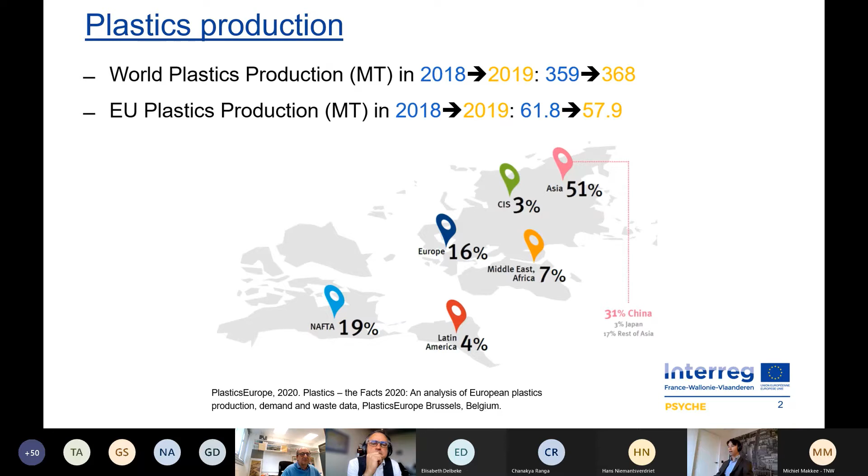As you can see, the world's plastics production is still increasing. In Europe, there's a small decline, but still it's very high. And recycling is high on the EU agenda. Next to plastic production, of course, you have product manufacturing, you have use, and then you have different options of recycling. It can be under the form of energy recovery, it can be mechanical recycling, it can be chemical recycling. And if we do that, then we can try to reduce our CO2 footprint of the whole value chain.

The central piece of all these elements is also the energy aspect, and that's also partly discussed in this workshop series with what can we do, for example, with renewable electricity.

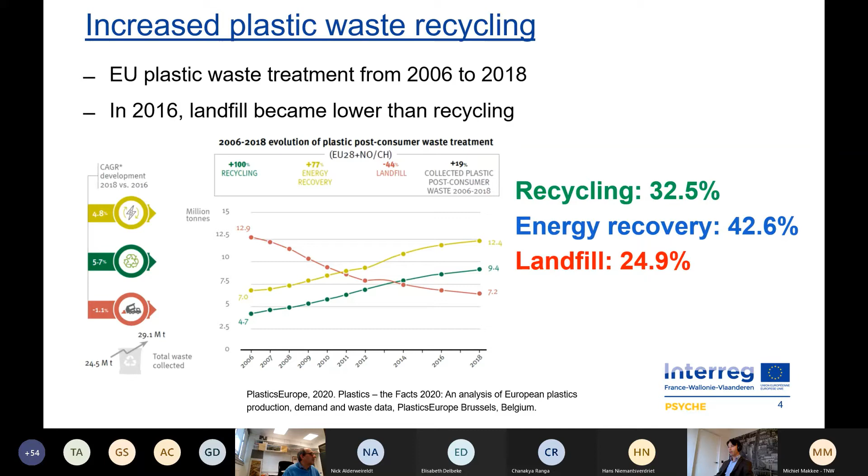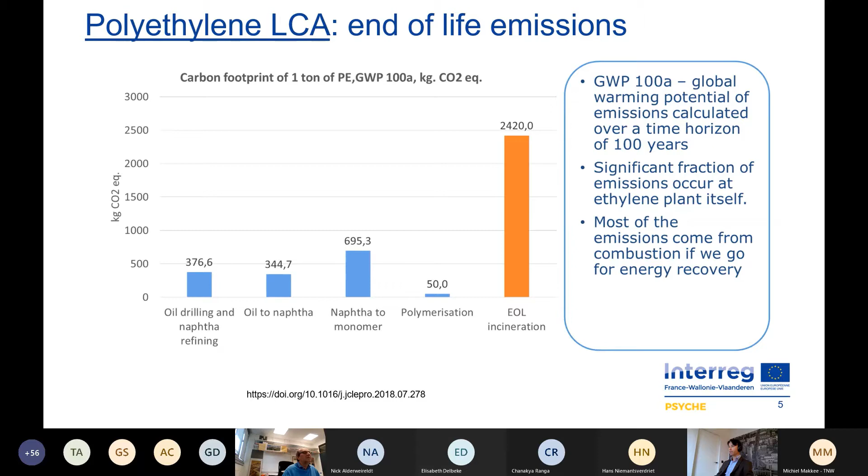So if you can avoid combustion, then we can make a step forward and drastically reduce emissions related to plastics production. Who are the partners?

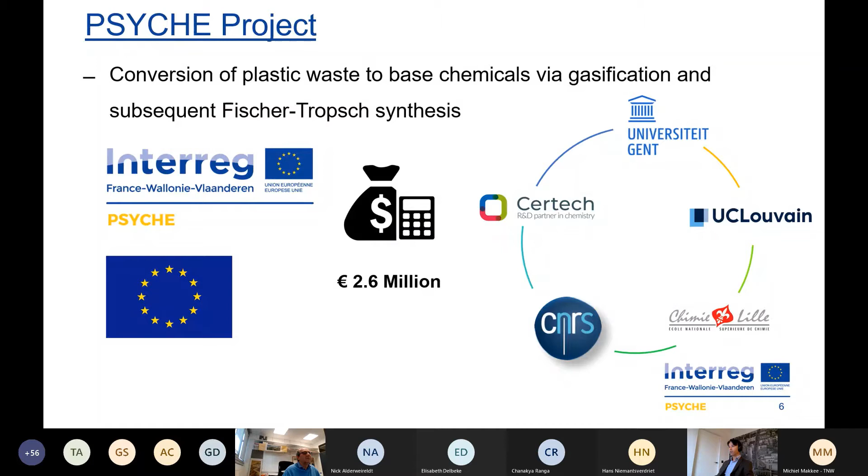So we have University of Ghent, which is my home institution. Then we have UC Louvain with Juray de Wilde. We have the University in Lille. We have CNRS and CERTECH. All these partners work together on this PSYCHE project, which got funding from Interreg, the France-Wallonie-Vlaanderen Interreg program.

The funding is 2.6 million euro. The central piece of this project has 2 parts: the pre-treatment and gasification of plastic waste, and then the syngas purification and the Fischer-Tropsch production of olefins. So the focus as an end product is really here on olefins. Next to that, of course, we have communication and education being part of the project.

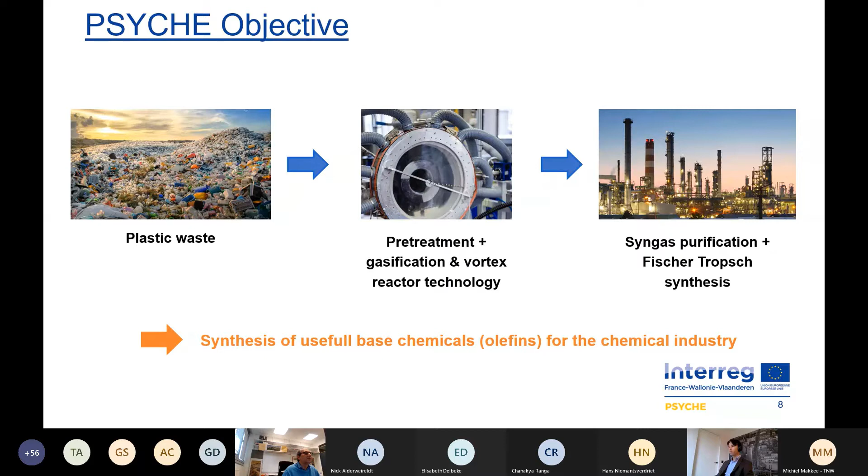The value chain in a nutshell, or a short overview, can be seen in this slide. So we start from unsorted plastic waste. We look at different pre-treatment methods. After pre-treatment, we can do gasification, and we do this in a vortex reactor technology that I will discuss later on. We go then to syngas purification and Fischer-Tropsch production, really wanting to produce useful base chemicals, olefins, for the chemical industry.

If you look at the slide from left to right, we have plastic waste, then the pre-treatment, then gasification going to syngas, which is a mixture of hydrogen and CO. Because there are also impurities in plastic waste streams like chlorine or other components, there needs to be purification of that syngas before it enters a Fischer-Tropsch plant, where the syngas is converted to, for example, 1-hexene or lower olefins.

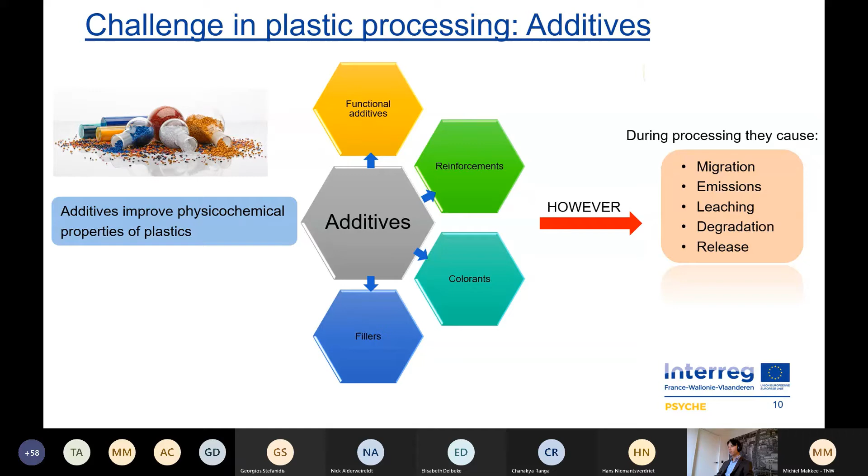Let's look a bit deeper at the pre-treatment step. We know that additives improve the physical chemical properties of plastics, and there is a whole range of different additives used: functional, reinforcements, colorants, fillers, and so on. However, for recycling, they do not make it easier, and removing them is not that obvious.

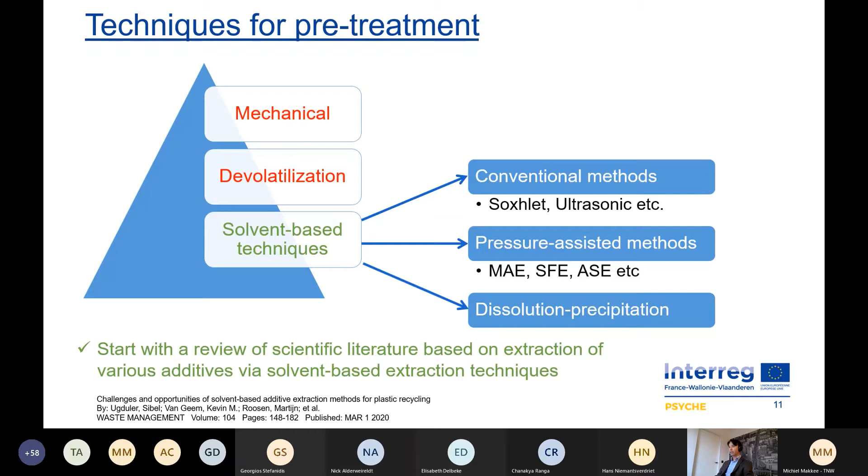The objective of that part is physical-chemical treatment of plastic waste via various extraction methods. We also look at different types of additives that we would like to remove, and in the end, we are optimizing that pre-treatment. I can say that Steven has made very nice progress in that part.

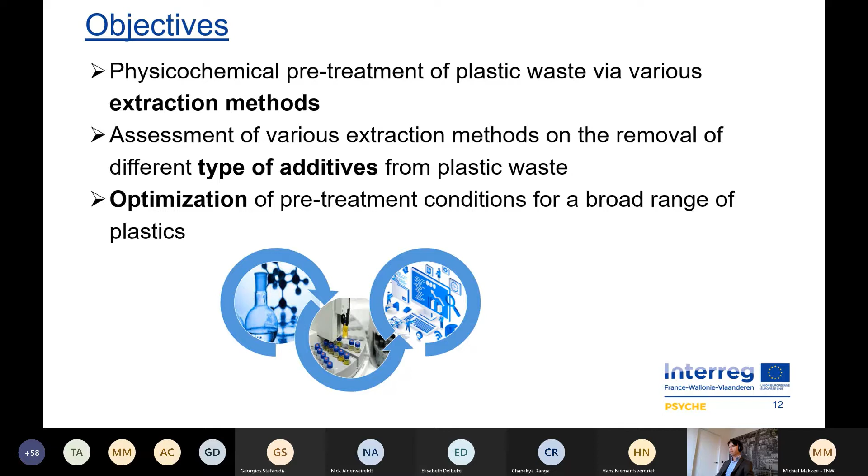Then we go to the gasification part, which is done in the vortex reactor. A vortex reactor is a bit of a special reactor, a sort of fluidized bed reactor, but not like a classical one. In a classical fluidized bed reactor, you have relatively low gas velocities because you have to work against gravity, meaning the gas velocity at the bottom is rather small, otherwise you have particle entrainment. You have a dilute bed in these technologies.

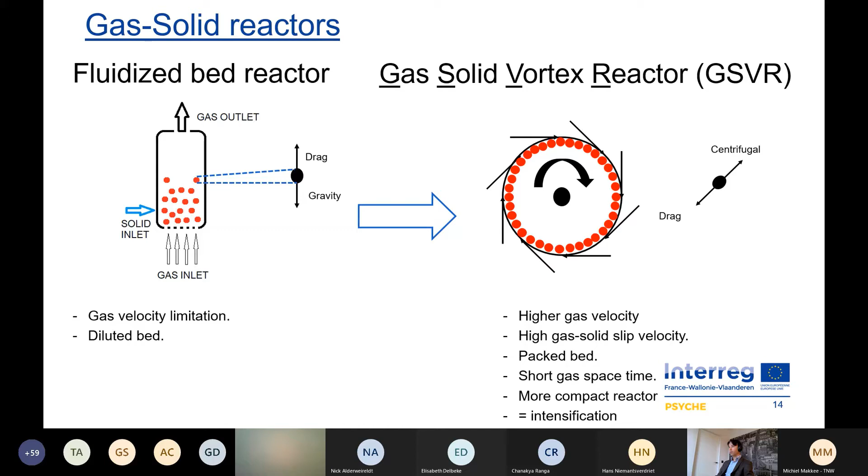If you look at our gas solid vortex reactor, it works a bit like your washing machine or dryer, where the particles are driven by the black arrows, which come in from the side and make the particles rotate at very high velocity. You can have very high gas inlet velocities, resulting in sometimes even a packed bed. The advantage is also very short gas space times, meaning you can avoid secondary reactions substantially. Overall, you end up with an intensified process, also with a smaller reactor.

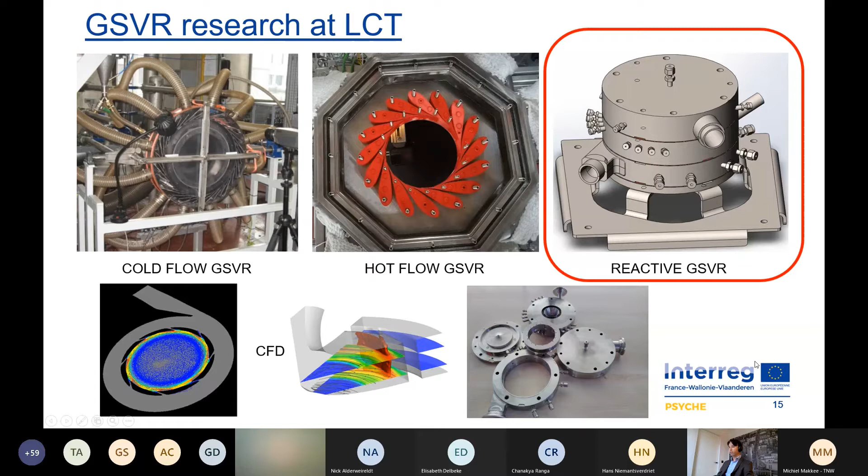You see here different reactor technologies that we currently have available in our group. The one on the right, you also see different parts here in the bottom. It's not only a nice drawing, but you see here the different parts of that vortex reactor technology.

So what happens is we have solid plastics. We go to the reactor environment via an extruder, so that's the plastic melting. That liquid is fed to this vortex reactor where you have pyrolysis and gasification going on. Then you end up with char and some remaining tar, but mainly vaporized and cracked gaseous products that in the end are mostly CO and hydrogen.

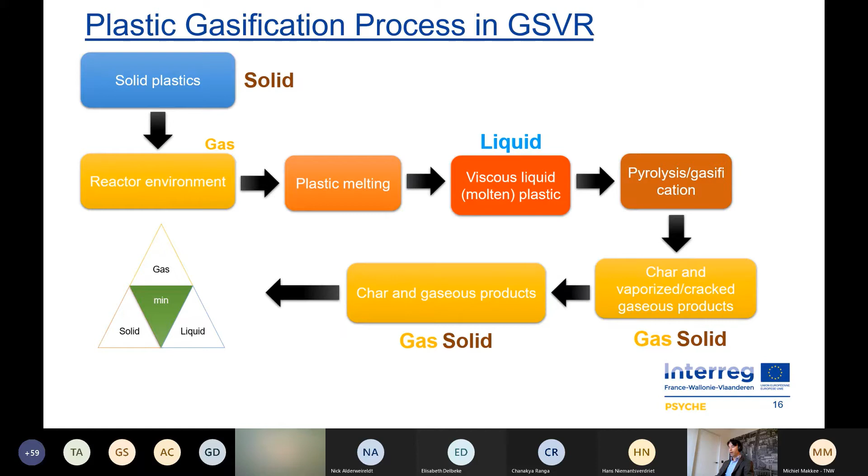By simple separation, we are able to remove the char in a cyclone, and in this way we end up with the syngas that can then be fed to the Fischer-Tropsch unit. What do we try to do in this project?

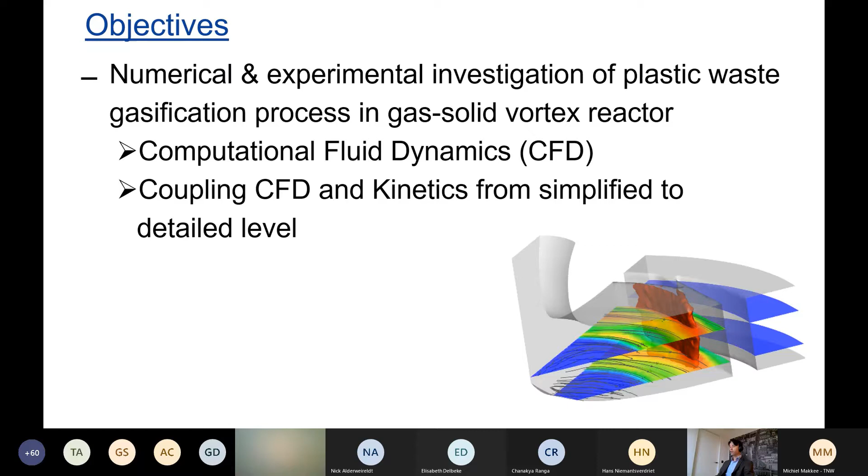Finally, we end up with the olefin production step. Of course, you can do this step sort of randomly - you can test a huge number of catalysts, screen them, and come up with the best design. In the PSYCHE project, we try to use model-guided catalyst design. This means we try to gain insight into the chemistry of the Fischer-Tropsch step.

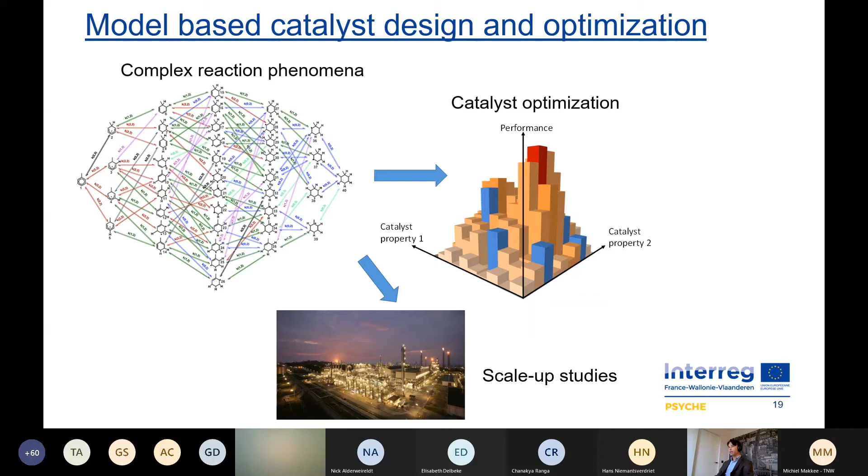We try to relate that back to catalyst properties, and when we understand how those catalyst properties affect the final selectivities, we can use that in our models and perform scale-up. If you look closer, in the end what we do is we have the reactor model equations. In those reactor models, you have the detailed chemistry, shown here as the microkinetics, which accounts even for things happening on the pellet scale. By integrating all these phenomena on the full reactor scale, we can predict in advance what will come out of this Fischer-Tropsch reactor.

Because we have some variables in this kinetics which account for the catalyst, you can basically optimize the whole system and come up with optimal catalysts.

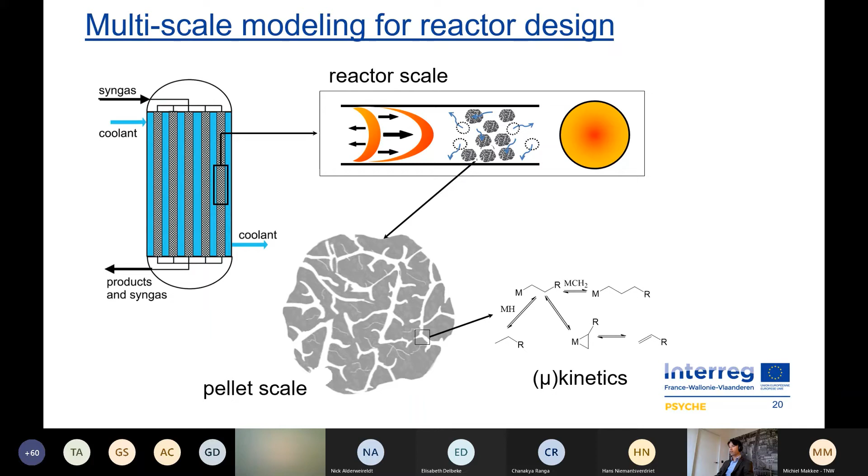Obviously, it's a challenge to account for all these catalyst descriptors in the model. But thanks to the group in Lille and CNRS, we have very unique data that we can use to validate this whole system, and that's what you need in the end to become predictive.

So now we have models that are able to describe the experimental data, but we also need to be predictive. This means we have to be able to account for changes to the catalyst, and this is still a step we have to take.

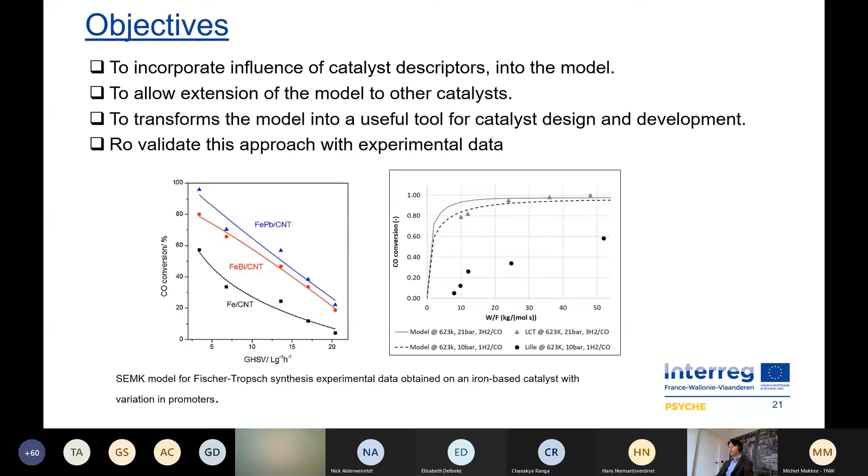Taking us back to today, if you do all these conversion steps, typically we use combustion to provide the energy for all these processes. If it's an exothermic process, you don't need a lot of energy, but if you have endothermic processes, then you actually need energy.

What we really try to do now is take this one step further: how can we further reduce CO2 emissions, or how can we even use CO2 in our processes. We hope that by electrification of this whole system we can further bring down emissions, but of course this only works when you use renewable electricity. If you use electricity from the current grid system, this is gray, and this results in additional emissions, sometimes ending up with worse situations than today.

We'll have some examples by Giorgio Stefanidis here today, where he will go into plasma technologies and see how we can use that to drive this chemical process.

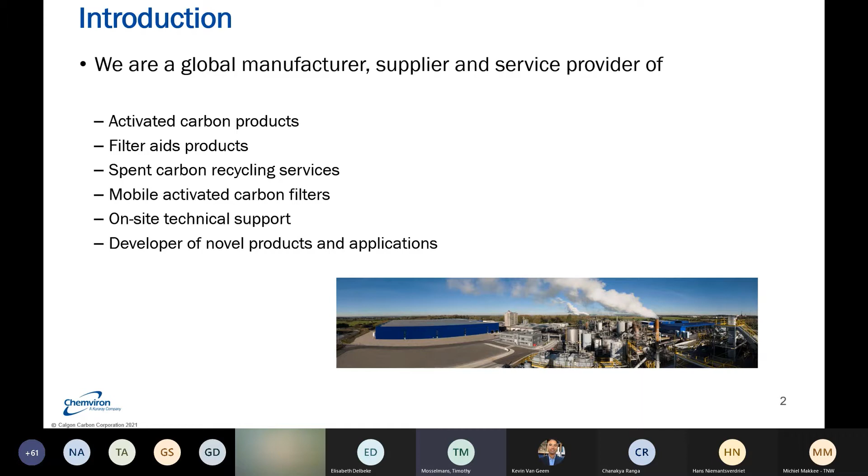So some quick numbers, maybe also noteworthy is that in 2018 we were acquired by Kuraray Chemical Group, and since then we are the environmental services division, although we do much more than just environmental solutions. We are also very active in purification of gaseous streams, liquid streams, and so forth, but more about that later on. So in Europe we're called Chemviron, but everywhere else in the world we are called Calgon Carbon.

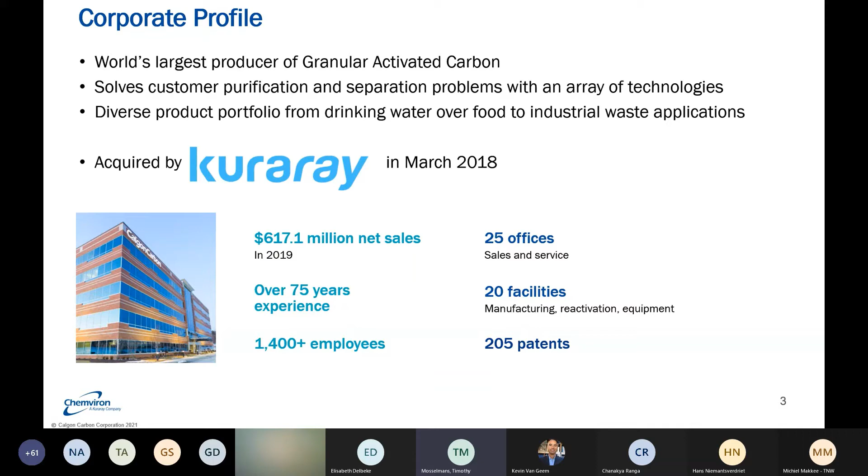As I already said, we are a global company, so that's quite interesting because some of our projects start off in one part of the world and then expand further and further through the whole globe. So we are in a position to basically follow the needs of our customers from one area to another. Maybe interesting to notice is that most of the activated carbon production is focused in the United States and in Asia. There's very limited production left in Europe, as in a lot of industries. But we provide our recycling services throughout the whole world, not only in the US, but very strongly as well in Europe. That's probably our main activity in Europe—recycling—and as well in Asia.

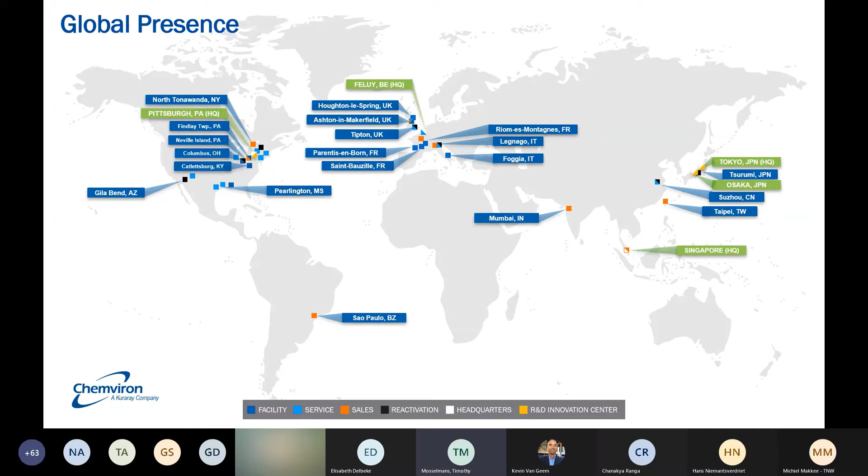Okay, so where can you use activated carbon for? When you look at industrial processes, we can do a lot of things with activated carbon. It can be purification of emissions to the air that are developed in a production process, or could be, for example, in refineries or similar, purification of liquid streams, of gaseous streams.

I'm thinking, for example, purification of natural gases, other pure gases in refineries that are done with activated carbon. Typically it's the removal of the final concentration of impurities, for large concentration ranges people tend to use things like scrubbers, but these scrubbers operate with liquids, and these liquids need to be regenerated. They can be fouled, and the fouling can again be removed with activated carbon. So we are present in quite a bit of different applications, just alone even in the refinery.

Next to the chemical industry, we are also present in drinking water, purification of wastewaters. A lot of food products are also purified with activated carbon to remove colors, to remove pesticides, other unwanted byproducts. Those are all things that can be done.

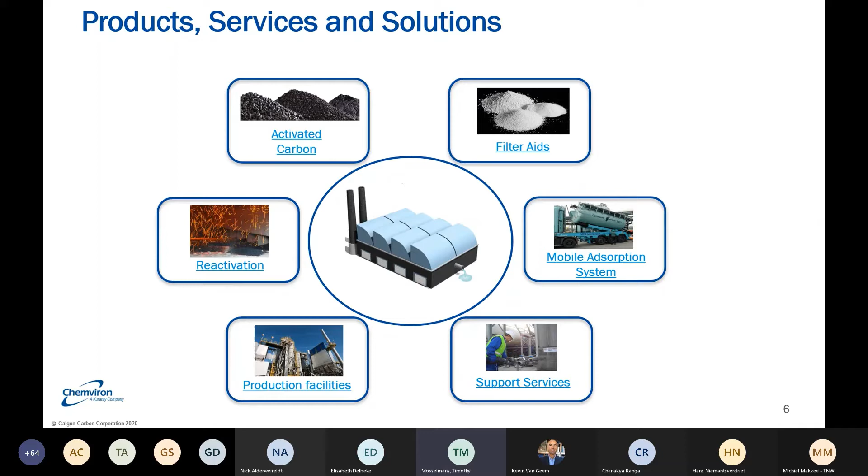We have seen in the previous presentations that incineration emits a lot of CO2, and that's something that came to our attention many years ago already. That's why we focus a lot on the reuse of activated carbon, because the material itself has a limited adsorption capacity. So it removes the contaminants and stores them inside its porosity.

So when that material has been exhausted, it has to be taken out, and in the past it was either landfilled or incinerated, but more and more we are recycling this material, and in Europe we've been doing that already since the end of the 1970s. We recycle the material thermally, where we destroy the impurities that have been adsorbed inside the pores of the activated carbon, and we reinstate the adsorption capacity of the material.

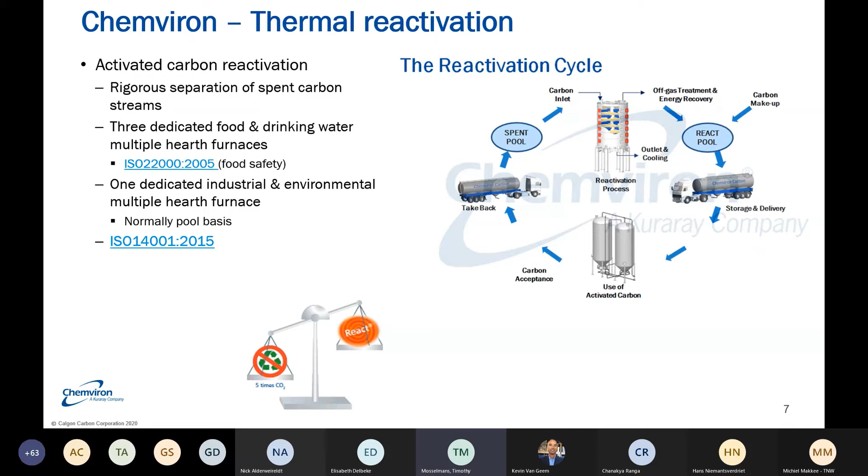So then I move to the next point. What is in fact activated carbon and what does it do? Well, activated carbon is basically a very crude form of graphite, which renders the material highly porous. And not only that, it also establishes a very wide range of pore sizes.

But it's really this random structure that gives the high porosity of activated carbon. So it's not really like a molecular sieve or a zeolite where you create a definite range of pore sizes that molecules have to migrate through. This is a very random structure where molecules diffuse in and are retained through van der Waals forces.

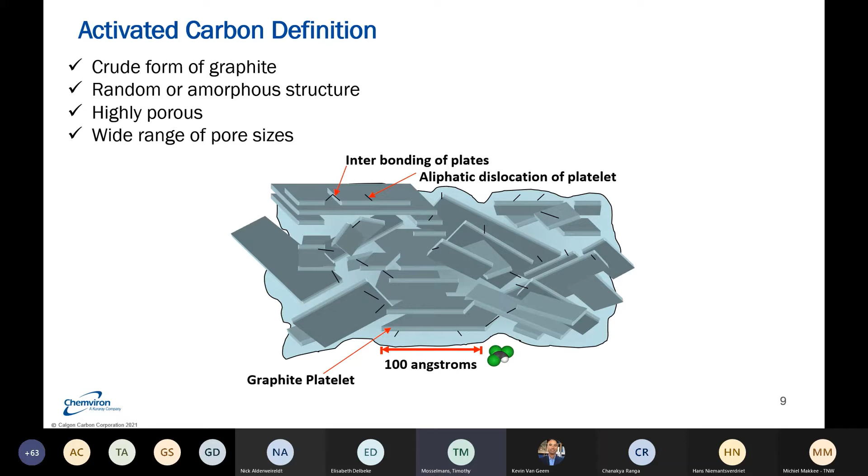Inside this structure, to give you an idea about the porosity or surface area internally inside activated carbon particles, if you would take 5 grams of activated carbon and cut it open and fold open all of its internal surface area, you would cover with 5 grams an entire football field. That's the amount of internal surface area available for purification, or in some cases for reactions to take place.

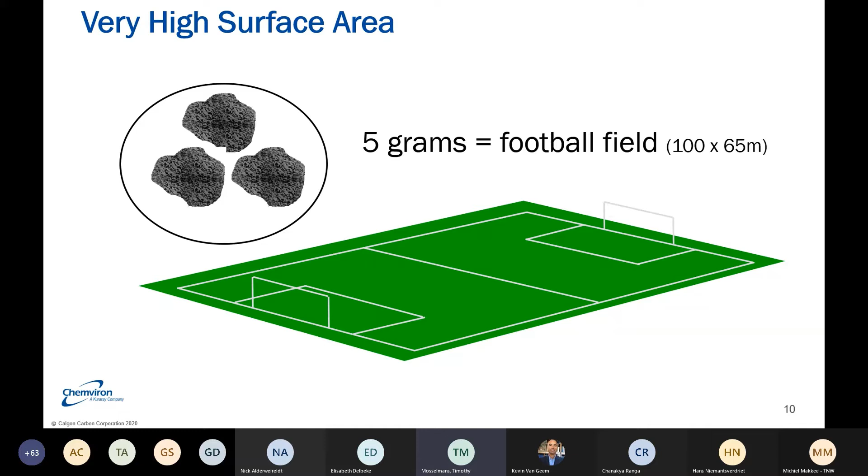Now, how are molecules retained inside activated carbon? Well, that's through adsorption, so the molecules do not change on itself. They are simply diffused inside the activated carbon, and then held in place through van der Waals forces, London dispersion forces to be even more precise.

It's thanks to the high internal surface area that a lot of interactions are developed with the molecules or impurities to be removed, and thus they are retained inside the porous structure of the activated carbon until they are either incinerated or until a reactivation is performed on that spent carbon.

Next up, this is a sort of cutaway view of how activated carbon would look on the inside and how adsorption takes place. To give you an idea, in a particle of activated carbon you would find about 35% carbon skeleton, 25% transport pores, and about 40% adsorption pores.

This is for activated carbon made out of coal. If you use another starting material, you get another ratio of skeleton, adsorption, and transport porosity. This ratio is quite important because on more viscous streams you need more transport porosity, whereas on gaseous streams, where diffusion is quite rapid, you don't need a lot of transport porosity, and thus you can aim for more adsorption porosity.

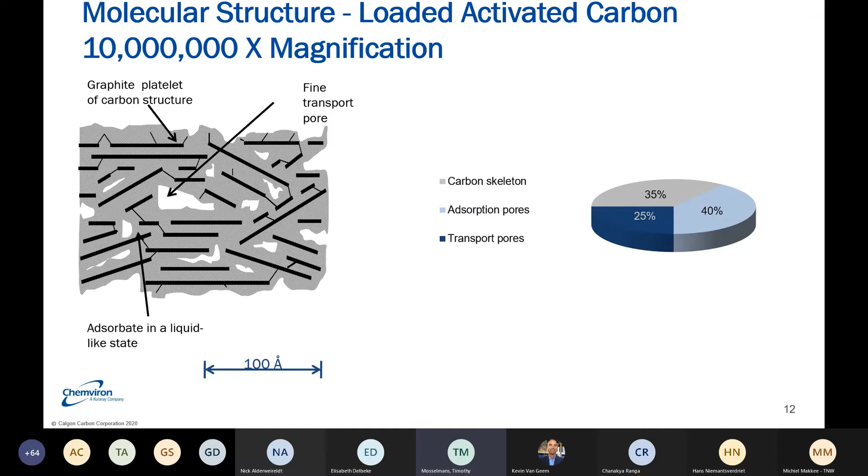So this is a little bit quickly explained how activated carbon can retain molecules inside its structure. Now, if we look at the different forms of activated carbon, as I said already, different raw materials can be used to produce it. They will also generate a different porosity structure, but we can also develop different ways of how the carbon would look like.

For example, we have carbon cloth, which is more for wounds, medicinal applications, and also some military applications. But you can also make activated carbon in a powdered form, a granular form, or an extruded form. Powdered activated carbon is typically used in labs or in batch-wise liquid applications, whereas granular activated carbon is used in liquid applications as well as gaseous applications.

Obviously because of pressure drop reasons. And also for these pressure drop reasons, in gaseous applications, we use extruded, pelletized, or cylindrically shaped activated carbon. That's really where pressure drop is the most limiting factor for the overall treatment. So different forms exist, different raw materials exist, and thus the choice becomes based on what we need to remove, what are the conditions, what are the constraints for the end user, pressure drop or certain performance. We will make a choice on what can be the best solution in that case.

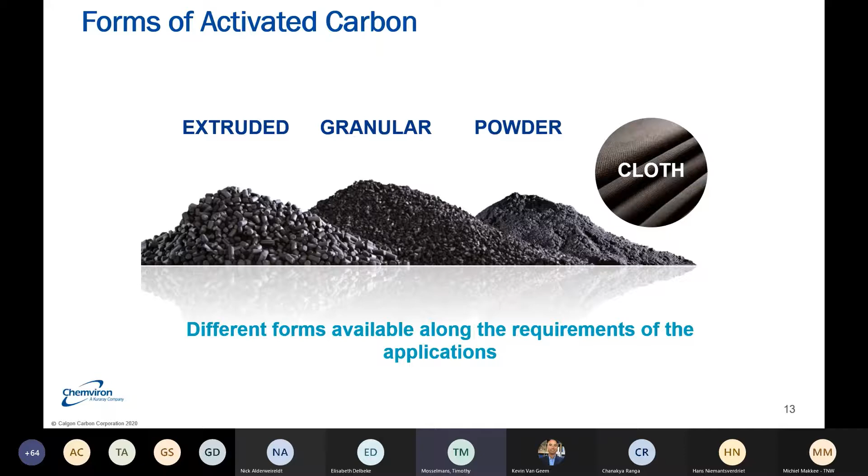A little bit more about what activated carbon can remove now. Activated carbon itself, as I mentioned, is made out of graphite platelets that are randomly organized. Now, graphite is a very apolar, hydrophobic molecule, so it's quite logical that the molecules that are preferably removed with activated carbon are also hydrophobic in nature. And basically, the flatter their 3D structure is, the better they are retained. So molecules with multiple aromatic rings are typically very effectively removed, as well as larger molecules. The bigger a molecule becomes, the more interactions it can make with the surface of the activated carbon, and thus, as a consequence, the stronger it can be retained inside the pore structure.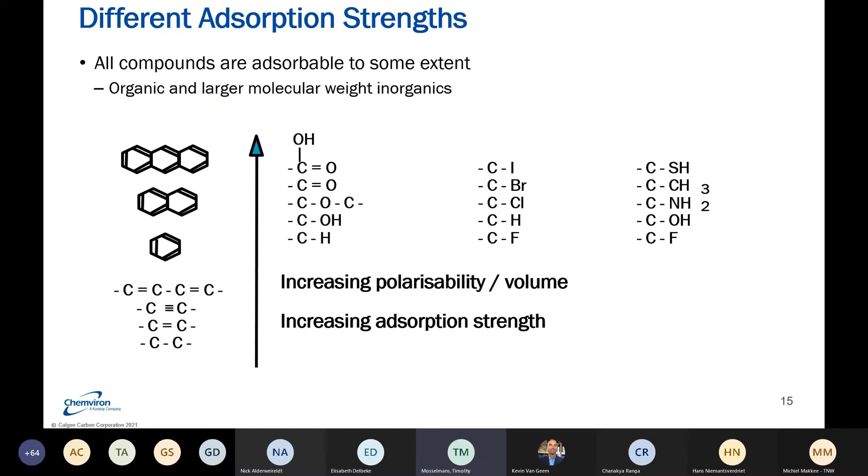Now, there are several compounds which don't fall into these categories, like, for example, smaller molecules such as formaldehyde or hydrogen sulfide. But for those, there are also solutions available. This is then more when it's a little bit of trace contamination removal, a few hundred ppmv, for example. At very high concentrations, people would maybe look at scrubbers, but at a few hundred ppmv down to a few ppmv, impregnated carbon can be a solution for removal of these compounds.

Impregnated carbon is basically the activated carbon, so the porous structure of the activated carbon, which gets impregnated or filled with an active agent. Typically, it's a salt that engages into a chemical reaction with the impurity which we would like to remove. And the reaction product is thus retained, either because the molecule has become bigger through an oxidation, or the molecule simply is associated with this chemical salt and thus is retained.

Molecules that are very effectively removed as such, for example, hydrogen sulfide, ammonia, carbonyl sulfide, mercury as well, phosphine, arsine, and the list would go on a little bit further. In these kinds of processes, temperature, humidity, pressure, and concentration as well of other compounds can be very important factors.

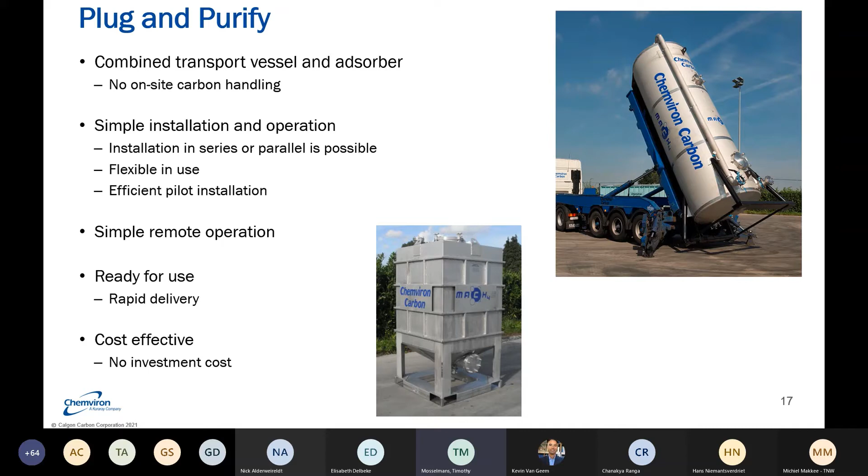Give you an idea about the size and what we're talking about. These type of adsorbers are capable of handling up to near half a bar gauge, with flow rates from 400 to 3000 actual cubic meters per hour. These adsorbers can accommodate the use of around 50 tons of activated carbon per year up to several hundred tons. The smaller one can hold 2 cubic meters of activated carbon, whereas the bigger one is typically filled with around 18 cubic meters.

And these are adsorbers that are approved for uses in, for example, biogas, biomethane, or biosyngas.

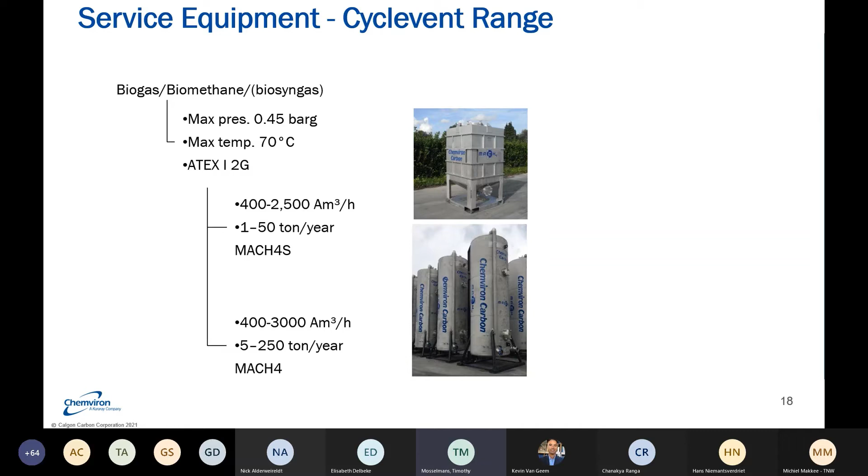Now I have something as well added on the purification of syngas. For example, what kind of contaminants do we see in different syngas applications, and what can be removed?

Well, if the syngas is produced out of biomass, we sometimes have requests for removal of hydrocarbons, for example terpenes, or hydrogen sulfide and carbonyl sulfide. For hydrocarbons, we'd use a simple non-impregnated activated carbon, the EnviroCarb range, that makes interactions with these hydrocarbons and retains them inside its porosity. For hydrogen sulfide and carbonyl sulfide, you'd need an impregnated carbon, as these molecules are too small to interact with the surface of the activated carbon. Important to note with these molecules is that humidity, oxygen concentrations, and concentration of other impurities can have a profound impact, and different solutions will exist depending on the situation.

Syngas in refineries, we can find hydrocarbon and H2S type contamination. We can also find mercury as a contaminant, for which we have an activated carbon that we've been using since the 1970s in refineries for removal of mercury down to nanogram levels. Next to that, there's also iron and nickel carbonyl that sometimes pops up in the pre-treatment of syngas. Those two molecules are in fact very effectively removed on activated carbon - they're sufficiently large, and thus very effectively removed on this non-impregnated BPL type activated carbon.

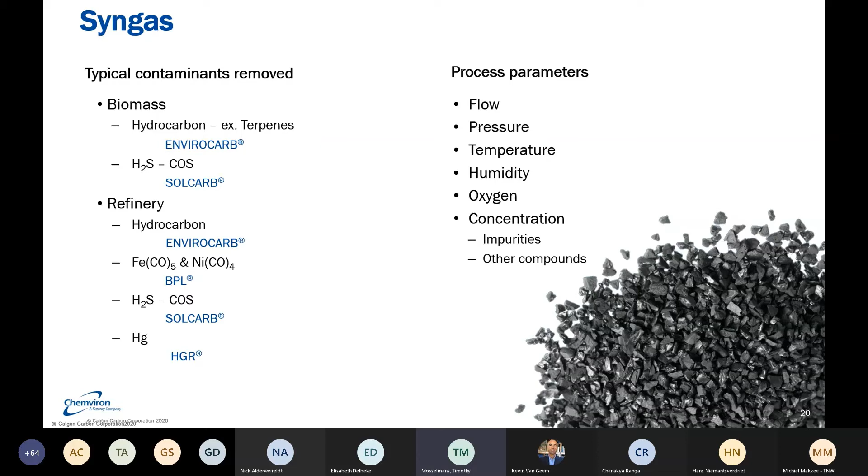Now, next to this, I have here with me a small example of removal of terpenes in a biosyngas application. So it's a system - you can see it's a little bit of a remote system. It was added onto a site where we have a flow rate of around 1,000 normal cubic meters per hour, a slight overpressure in the system, and ambient conditions, obviously, because everything is located outside in terms of temperature.

And because they started off as a new project, they were interested in using our plug and purify adsorbers at first. So we provided them with the larger one, the 18 cubic meter Mach 4 unit, for removal of mainly terpenes but also some other organics from this biosyngas. For that, we don't need any impregnated carbon, so we chose the EnviroCarb range activated carbon, a granular one, as it was compatible with the requested pressure drop and also provides for a better distribution of the flow.

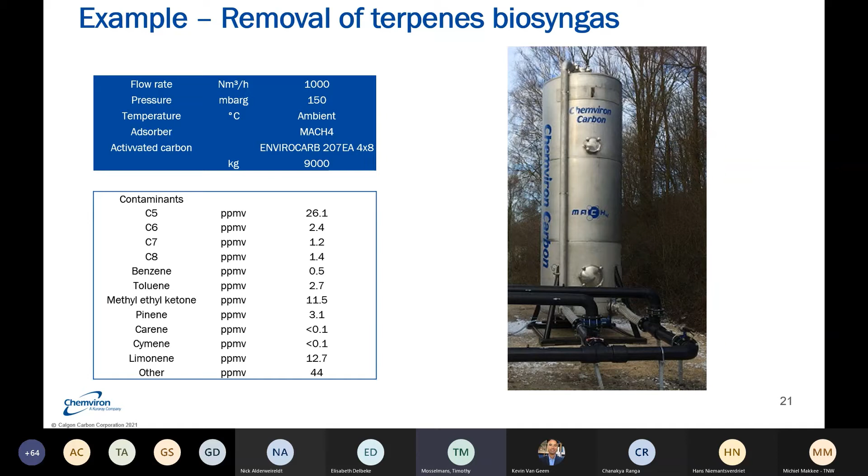So in terms of the contaminants that were requested to be removed, we see it's a very broad range going from C5 to C8 alkane type compounds, as well as some traces of benzene, toluene, and also the terpene molecules that were identified. Now, as I already mentioned, these molecules will diffuse into the pore structure of the activated carbon and be retained there.

But by doing so, they will need a certain length in time, path, or bed depth to be effectively removed, a little bit like in chromatography. Now each of these molecules would need to do that, so we get a complex pattern of different mass transfer zones that develop.

Internal competition will come into play. So what we do is first look at the conditions presented by a project or customer, then make an evaluation about the sizing. The sizing is not only based on adsorption capacity itself, because compounds like benzene and toluene are very effectively removed on activated carbon, with very high adsorption capacity.

But when we look deeper using our proprietary adsorption models, we see that some molecules that are very effectively removed would in fact be the limiting compound of the whole exercise. For example, pentane-type molecules are present at the highest concentration but only elute as the third compound out of our columns. Benzene, present at very minute concentrations, is actually the limiting compound of the whole column.

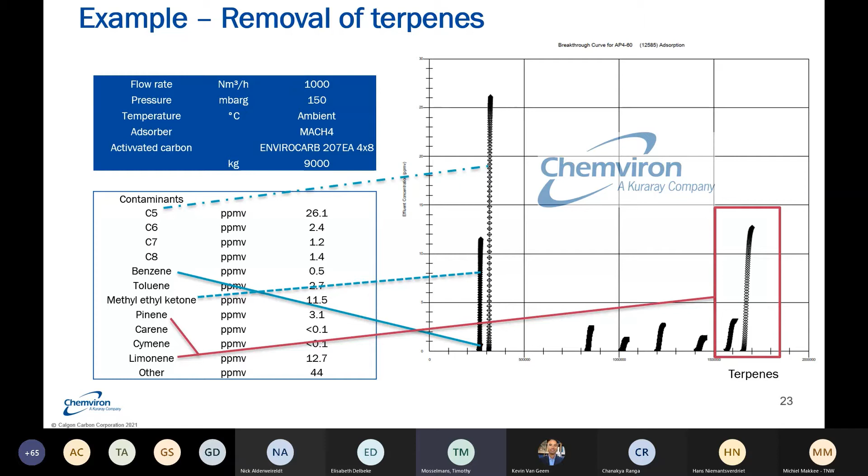In conclusion, activated carbon is a very versatile means for purification. A lot of different compounds can be removed. Either fixed adsorbers can be made, or people use plug and purify through mobile adsorbers. Quite importantly, we try to recycle as much as possible the used activated carbon to make a closed loop and limit our CO2 footprint of activated carbon solutions.

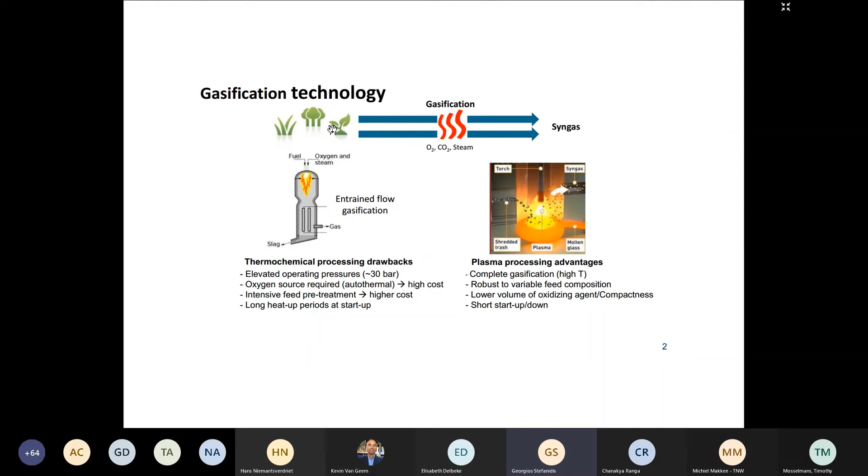And the fact that we can decouple the composition of the oxidizer from the energy fed into the system also gives some flexibility with respect to tuning the composition of the product. As you're going to see later, it's a very fast responding process, so the time to steady state is really fast.

Now, when it comes to plasma gasification in particular, there are different types of plasmas. The most mature one that has been applied for gasification is thermal plasma, which you should understand as plasma being in thermal equilibrium—meaning all the species inside plasma have approximately the same temperature. The system is in thermal equilibrium, so the degree of ionization is very high. The electrons generated get a lot of energy, which they transfer to ions and neutrals, and eventually the system comes to thermal equilibrium.

But that results in excessively high temperatures. In the core of the plasma flames, you may have temperatures that well exceed 10,000 degrees Kelvin. So the temperature is really way higher than what is needed for gasification, and that's not a good thing.

Also, it's a process that involves electrodes, which have a relatively limited lifespan. They need to be replaced frequently, which requires quite some maintenance. Also, the product is contaminated due to frequent electrode erosion. Also, quite some electric energy is dissipated into heat, not inside the reactor but inside the hardware itself, which limits the overall energy efficiency. Nonetheless, this is still today the most mature technology for this kind of process.

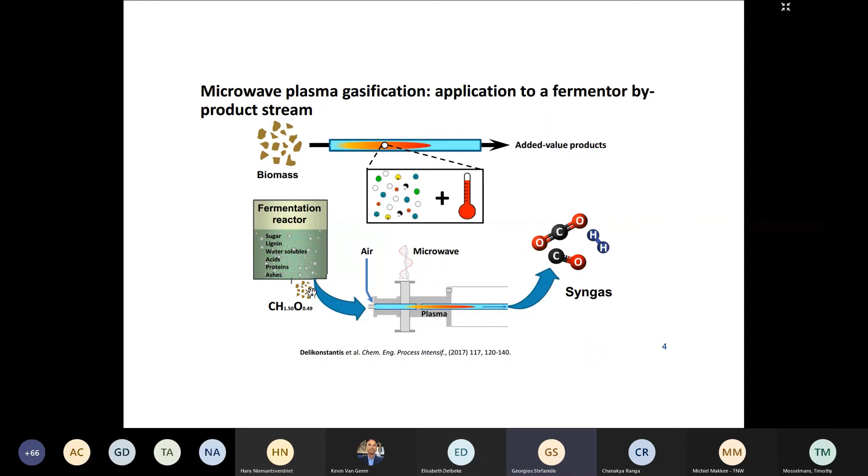The elemental composition is carbon, hydrogen 1.5, oxygen 0.49 for the results you're going to see. These samples were provided to us by Clariant, and the analysis was done by them too.

So this is the setup that we had developed at the University of Delft. The main part is this one, the microwave part of the equipment. On the right side you see the magnetron. It works up to 6 kilowatts. It delivers continuously microwaves through this waveguide into the reactor assembly that sits here.

On the other side, there is a movable reflector wall that tunes the field such that we create a resonant field with one field maximum inside the reactor where gasification takes place. There are some impedance tuners here in order to minimize the power that goes back to the magnetron. There is an isolator here in order to absorb whatever power cannot be contained inside the system between the reflector and the impedance tuners.

On the top you see our feeding vessel, and this is the reactor assembly. I'm going to discuss some components in more detail. Process-wise, the carrier gas together with the biomass particles are fed from the top inside the tubular reactor. The diameter is 3 centimeters, the length about half a meter. Ignition takes place here, and the plasma flame points downwards.

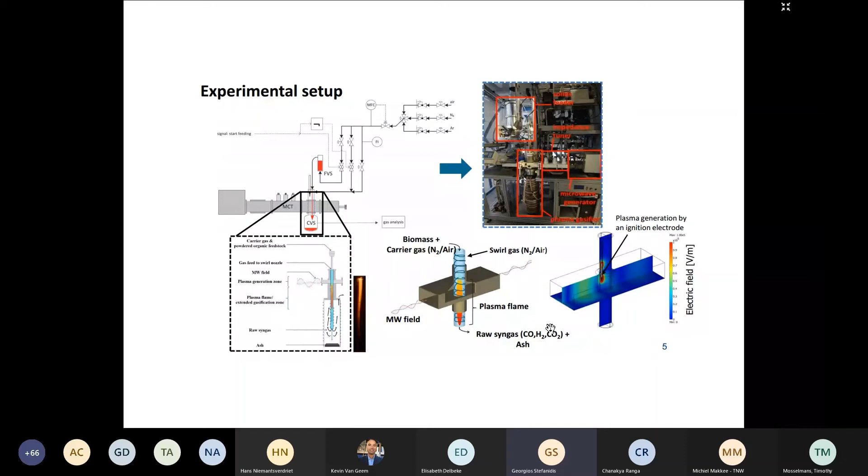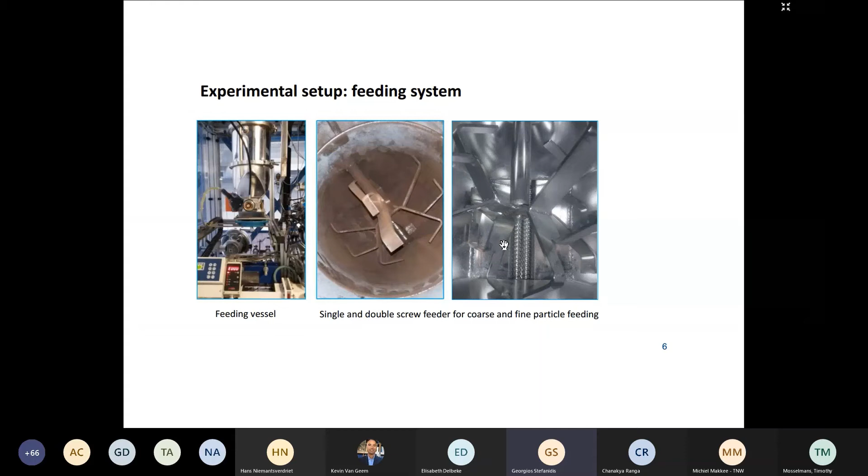This is the feeding vessel and the screw feeders that we were using. Single screw feeder and double screw feeder to be able to provide coarse and finer particles stably into the plasma flame.

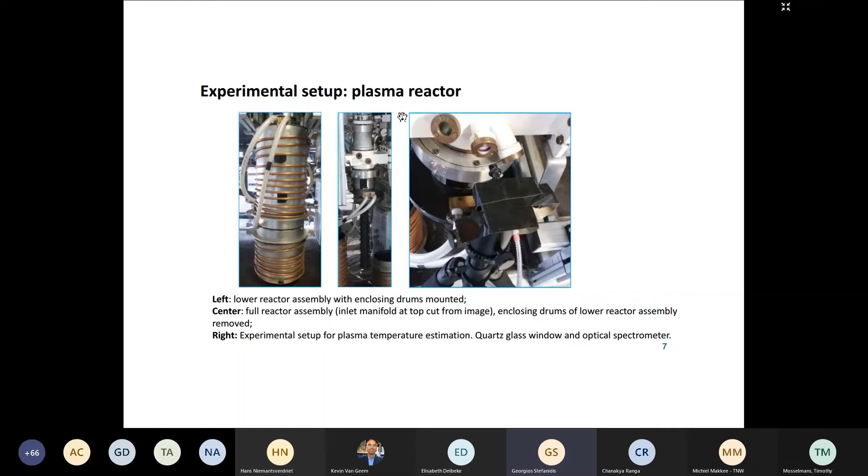When we do reactive experiments, the whole thing is placed in a drum, and at the bottom we collect the ash, and then the syngas product goes upwards and towards the backside of the reactor for further cleaning before we measure the composition of the syngas.

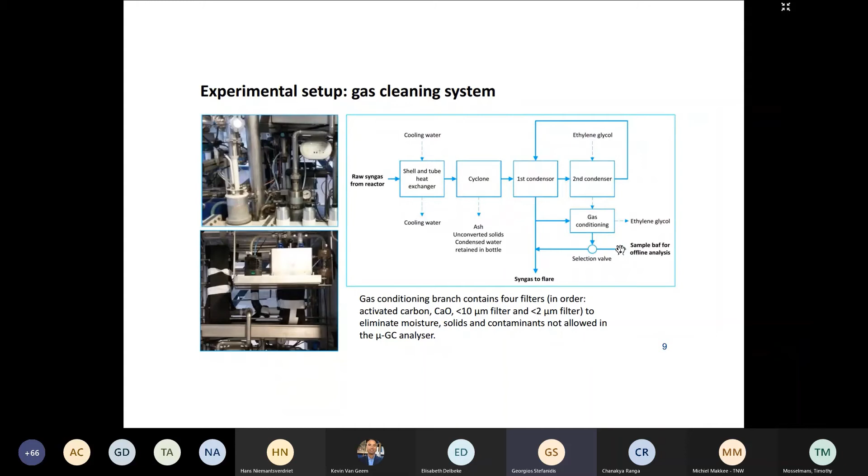And then we have, very briefly, the gas conditioning section that comprises four filters: activated carbon, a filter with calcium oxide, a 10 micron and a 2 micron filter, to eliminate all moisture, solids, and contaminants before the gas gets into the sampling section. So we sample part of the gas and the rest goes to flare. So this is briefly how the setup looks like.

Now a key issue in this process is the distribution of the heat fluxes and temperatures inside the system. That significantly affects not only performance but also the stability of the process, and it's a challenge to measure temperatures inside the system. We do the thermal analysis using non-reactive experiments, so we just feed air and nitrogen. We cannot do that while the gasification process itself is running, but that way we get a feeling of what temperature levels we have inside the reactor.

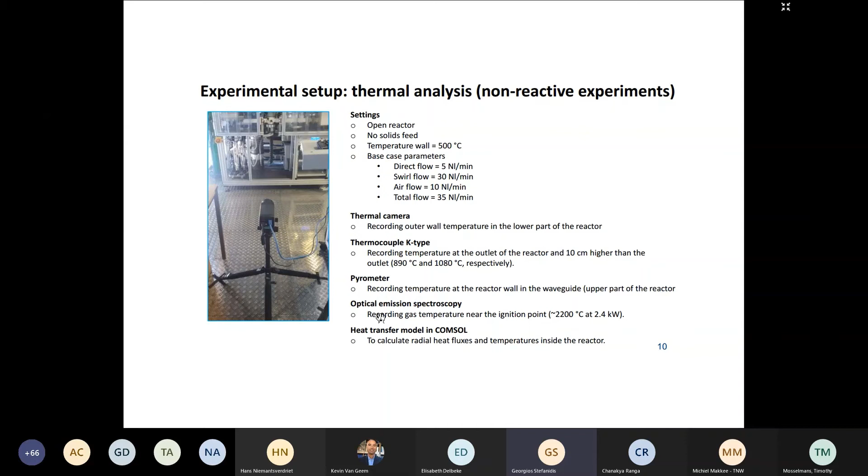So you see the temperature level at the representative power level at which we do the experiments, and you're going to see the results. And we also use a heat transfer model in COMSOL, without flow, to calculate heat fluxes such that they match these temperatures that we measure in the domain.

And the important thing from this analysis is shown here. No matter what material we use, we have to remove, only in the lower part of the reactor, some 40 to 45% of the total energy that we put into the system in order to be able to keep the wall temperature inside the waveguide limited.

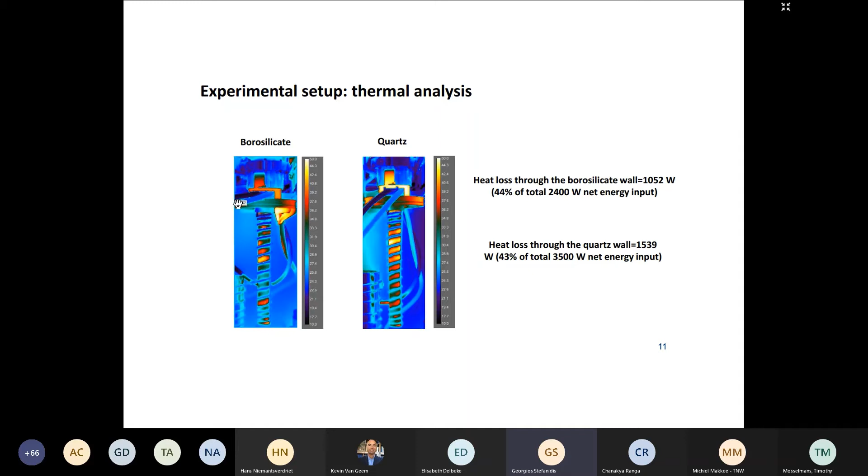What we observed is that when the temperature goes higher than this value, the temperature of the wall rapidly increases up to the melting point, which is 1700 Celsius. We would expect that quartz would be able to stand these temperatures, but...

What I think was happening is that the dielectric properties of quartz at these temperatures change, and then the wall itself, which is otherwise meant to be transparent, starts absorbing microwaves, and then we have a runaway phenomenon. The temperature goes to the melting point, and of course the process is shut down.

But even without this problem, we have also stability problems—material stability problems—downstream, even near the outlet of the reactor, when we heat and cool all the time due to thermal shocks, or when we don't tune the flows properly and we have the flame touching the wall, or when the temperature of the flame goes too high. Then we have initially swelling, and then eventually breakage, and we had to actually kill tens of reactors due to thermal failures. So thermal failure and significant heat losses—avoiding them is two important problems.

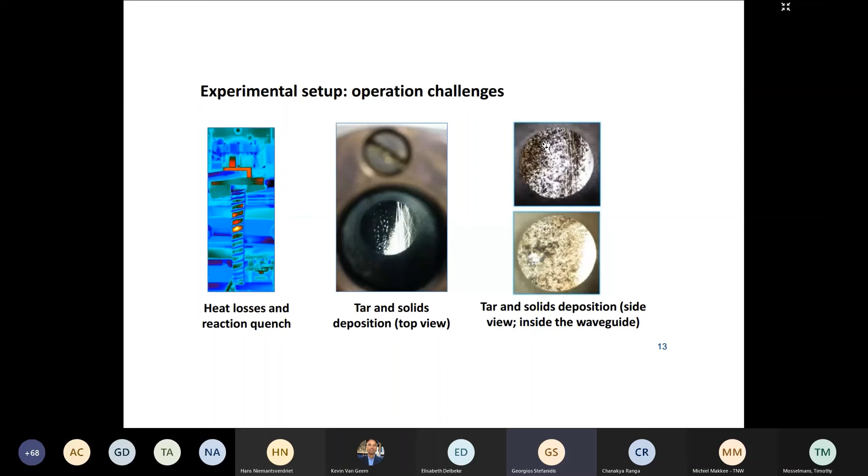The third main technical issue was the deposition of tars and solids on the walls. You don't want to have that. First, because part of the material is not converted, but other than that, when you have deposition of carbon on the walls, that prevents penetration of microwaves inside the flame. So microwaves are dissipated where you don't want them to be dissipated, that is on the reactor walls, and then you have the phenomenon that I described before.

So some results with that feedstock that I mentioned. This is the elemental composition of the feed, as received, on dry basis and dry ash-free basis.

Basically, what we wanted to do was identify an operating window for stable operation and for high performance. By high performance, we mean high carbon conversion efficiency and high cold gas efficiency, which in the case of plasma is defined by that ratio. In the numerator, you have the lower heating value of syngas, and the denominator is the lower heating value of biomass plus the power consumed by the magnetron.

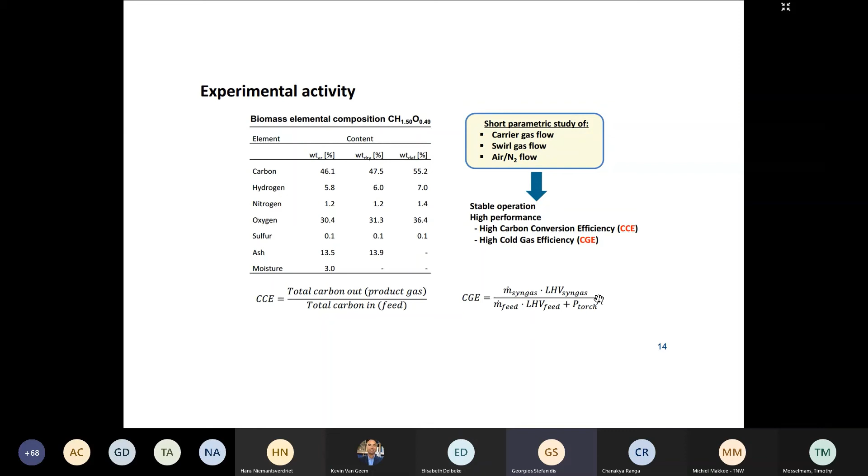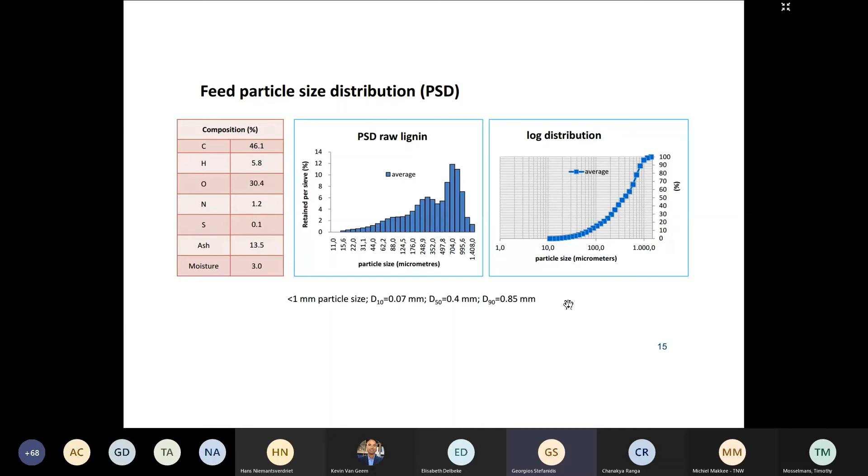This is the particle size distribution for the results I'm going to show. The particle diameter is up to 1 millimeter. You see the characteristic D10, D50, D90 values here. We also did experiments with finer particles, but I'm going to present the results for the coarser ones.

Very limited operating window. Stability of processing in this type of reactor is still a bottleneck. So this is the base case: the direct flow that carries the biomass down the reactor, the swirl flow, and the air to nitrogen ratio.

In experiments 2 and 3, we keep the direct flow constant and vary the swirl flow. In experiments 4 and 5, we vary the ratio of the direct and the swirl flow, keeping the total flow constant at 35 normal liters per minute.

The biomass feed rate was quite low, 0.1 gram per second. We can get the same performance with 10 to 20 times higher biomass flow rates. That's possible, we've done that, but the process is less stable, possibly because we feed through the ignition point, and when we increase the flow of biomass too much, that disturbs the ignition point and the process starts to fail.

Maybe it would be a better idea to feed from the side, but as I explained, this was the first effort of that kind.

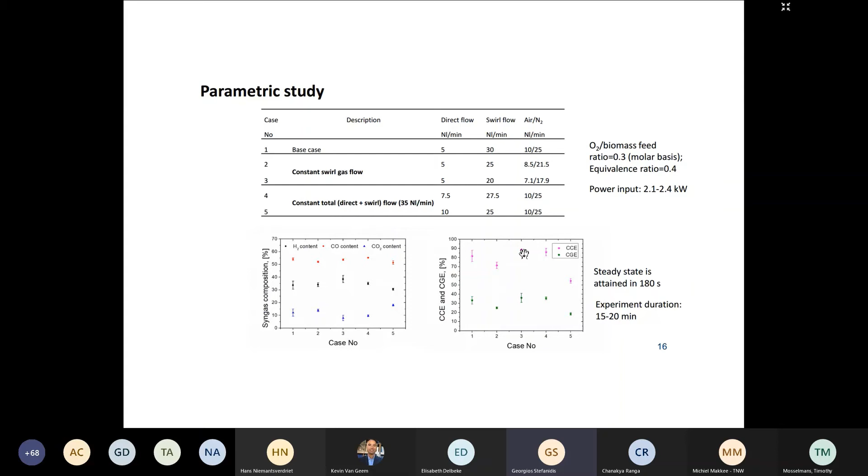In the best case, which is case 3, with direct flow of 5 normal liters per minute and swirl flow of 20 liters per minute, the cold gas efficiency was a little higher than 40%, and the carbon conversion efficiency was close to 90%. But recall that most of the energy we put into the reactor is withdrawn only in the lower part of the reactor in order to keep the wall temperature bounded.

We wanted to see how close the composition of the syngas is to equilibrium. So we defined a very simple equilibrium model, stoichiometric and homogeneous.

Several of these coefficients can be calculated from the operating conditions — for example, from the moisture content, the equivalence ratio, the type of gasification agent, and the air to nitrogen ratio. The remaining coefficients are calculated from the elemental balances, and we also assume that the water gas shift reaction is at equilibrium.

So we have 5 remaining coefficients and 5 equations to solve: the 4 elemental balances and the equation that defines the equilibrium constant for the water gas shift.

In our case, we did not take into account methane steam reforming; we set this coefficient to 0. The methane we measure in our experiments is less than 1%, so to keep it simpler we set that to 0.

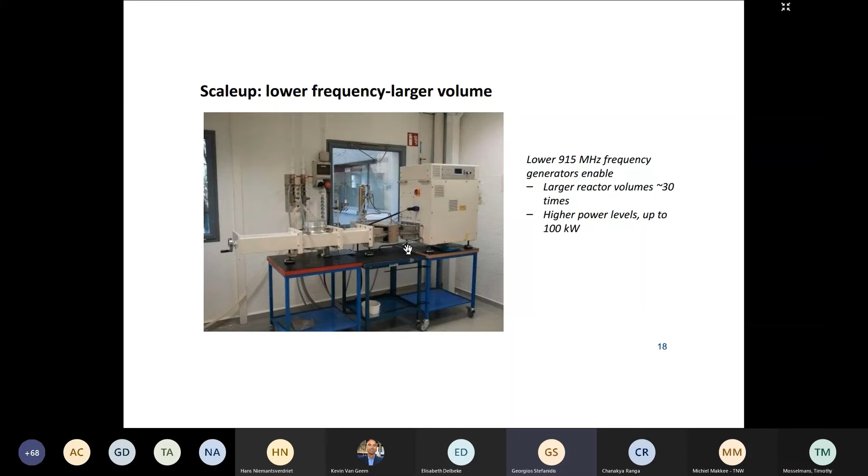But I feel this is the limitation of this approach. Essentially, we make a resonant field and we place the reactor in the resonant field, but eventually the size of the reactor is limited by the wavelength.

The alternative approach, I think, is implied in a paper which I usually show in my presentations, although it's not our work. It was presented by a Korean group in 2014. Strangely enough, although great performance is reported, there was no follow-up, no design details are given, and I could not find a relevant patent either. But it represents the alternative approach, which I think is the future for this type of system.

Instead of making the field and placing the reactor in the field, you first make the chamber and design the flows as big as you want to have the necessary throughput, and then you feed microwaves inside such a vessel by different magnetrons. You can use many, through open-ended waveguides. So you make the chamber and you throw microwaves in there.

Of course, as I said, the design details are not given here. But you see the size of the system is quite high. The diameter is 90 centimeters, the height is 180 centimeters. It's a 500 kilowatt thermal microwave plasma gasifier.

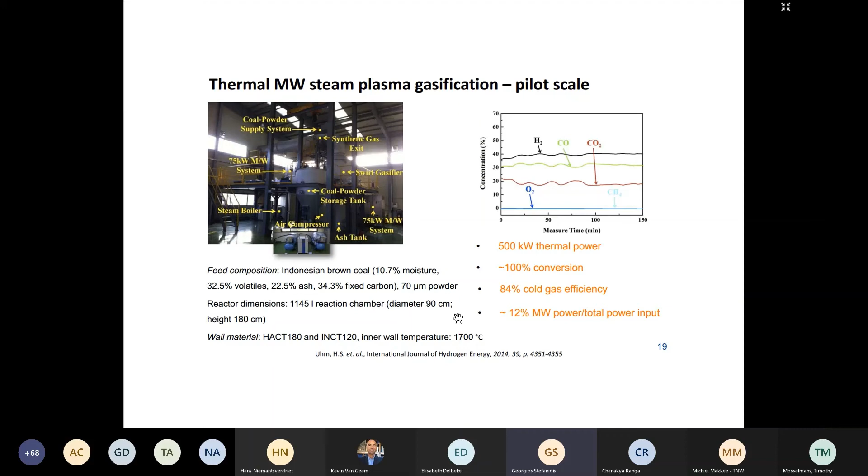Yeah, you have presented the results. Our experience from several years of work on this process is that there must be progress on the materials, on insulating the reactor — that holds also for other types of plasma gasifiers — and developing models that combine kinetics, flow, and heat transfer to be able to design these systems properly and optimize them, because what all groups that work in this field do is almost purely empirical at present. Okay, thank you very much.

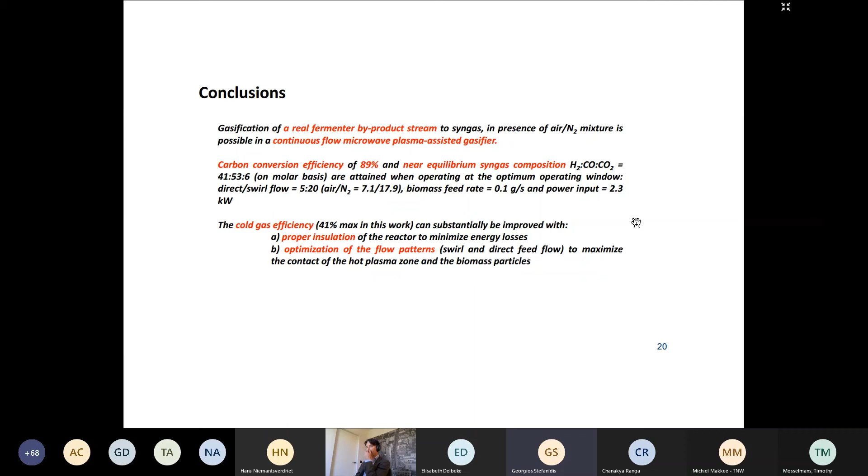Well, I guess plasma can be used two ways: either to gasify carbon with CO2 and make a stream of CO, or basically a stream of CO and CO2, which is needed for the super dry reforming process, but also for gasification of plastics.

Do you want to comment on the process that plasma can be applied to? Here specifically we have a plasma torch. Do you believe this is the right technology to integrate with these kinds of processes, or do you see other possibilities for plasma to interact with these CO2 converting processes, where they typically try to combine it with biomass or plastic waste? So is the plasma torch the right way or not?

Benoit, the floor is yours. Okay, I will give you some information about high temperature syngas purification.

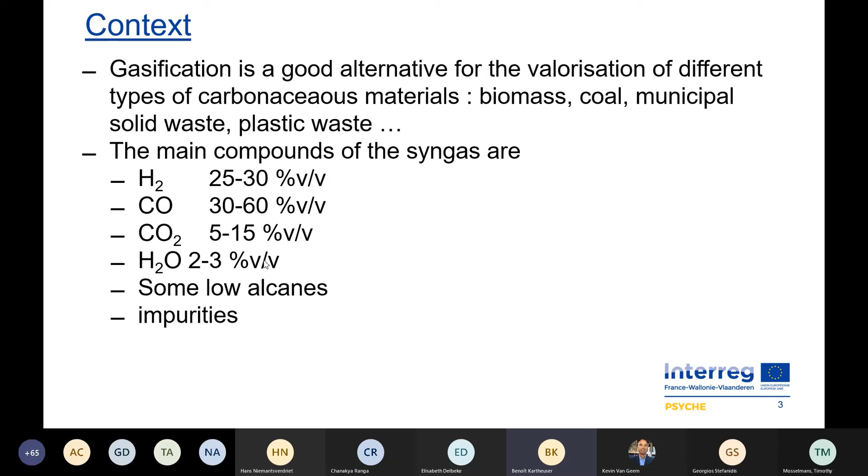As already explained in other presentations, gasification is a very good alternative for the valorization of different types of carbonaceous materials like biomass, coal, municipal waste, plastic waste, and so on. The main composition of the syngas are hydrogen, carbon monoxide, carbon dioxide, some water, and also some impurities that need to be removed from the syngas if you want to use it in other processes like the Fischer-Tropsch.

The different types of impurities are summarized in the tables here. You have some sulfur compounds like H2S that we already spoke about. The problems that we could have in different processes is corrosion of the system. Also, if they're just released to the atmosphere, it's pollution of the atmosphere.

We could find some halide compounds, HCl, HF, and so on. Some metal carbonyls, where there are problems of deposition that can block the systems. Some nitrogen compounds, which of course cause problems of emission on the environment if not removed. We could find some heavy metals like mercury, chromium, zinc, manganese, some tars, also some particles, some SiO2, silica, some ash. There are problems that they can also deposit in different places and downstream systems that really need to be removed.

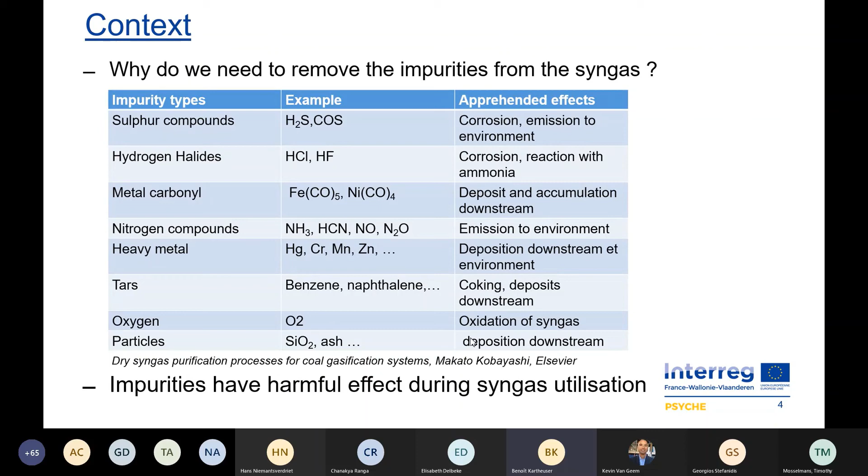Also, those impurities come from different types of starting materials, and then it's quite difficult to have only one process for any type of syngas system.

So how can we clean up the syngas? Actually, there are two ways to remove the impurities. The more well-known one is the cold gas cleaning process.

It's a very well-established system for the purification of syngas, but the problem is that we need to cool down the flow to low temperature, even sometimes room temperature, and need some heat exchangers in different places. Also, they usually use some water or some solvent to remove the impurities, which needs another process to clean up those byproducts, involving an increase in space to clean up the syngas.

In the hot gas cleaning process, HGC, we can work at higher temperature than cold gas cleaning, which means we don't need heat exchangers to control the temperature. Also, it's possible to have some regenerable sorbents, which involves less byproduct to be treated afterwards. But it's not a very well-established syngas purification method, and it's still in development.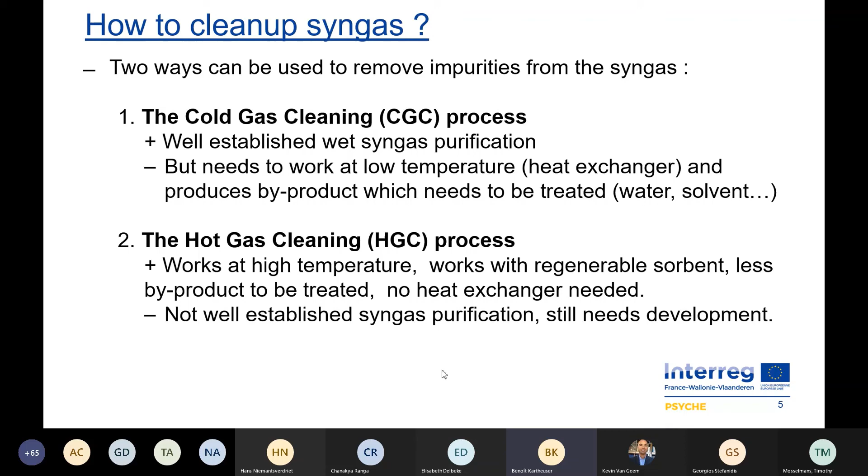We could find it on pilot scale experiments.

The different steps for the cold gas cleaning system are: cooling, like I said already, cooling the gas to the right temperature for the treatment. Usually there is a primary dust removal, so filters or cyclones. Then there's a scrubbing unit to remove the alkali, halides, and particles.

For the dry syngas purification at higher temperature, the ash and solid particles can be removed using high temperature filtrations, like a ceramic or metallic filter. Of course, there is a waste of just the particles.

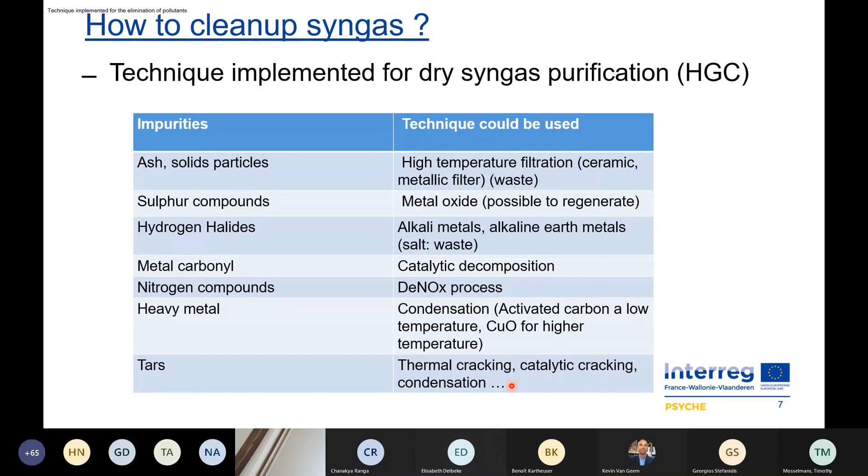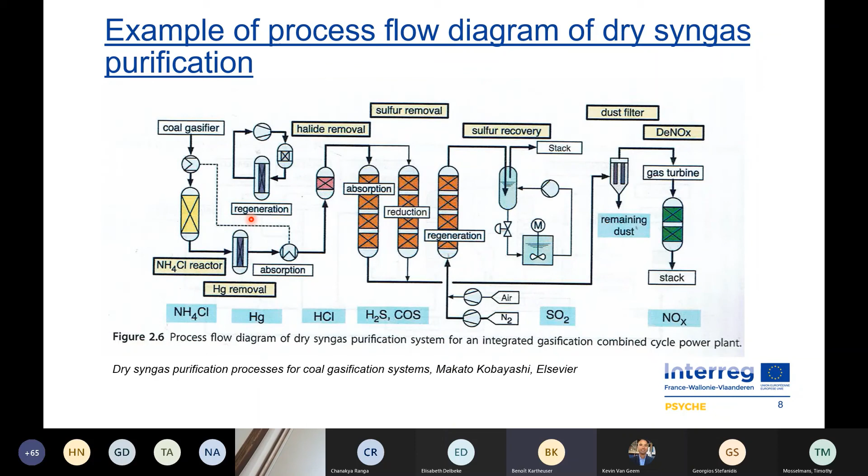I will have a look in more detail at the halide removal and the sulfur removal, and also quickly the mercury removal. In the case of the halide removal, Kobayashi developed some sorbent made of aluminate sodium systems, which can react with the halides and produce a salt.

This salt has to be removed. The major difficulty was to be able to make some pellets of those aluminate sodium.

Then they have a special formulation that managed to make those pellets, and they were able to work around 450 degrees. This is a curve of the HCl breakthrough curve, and it's very important to know the point where the pollutants start to be detected again in the gas phase.

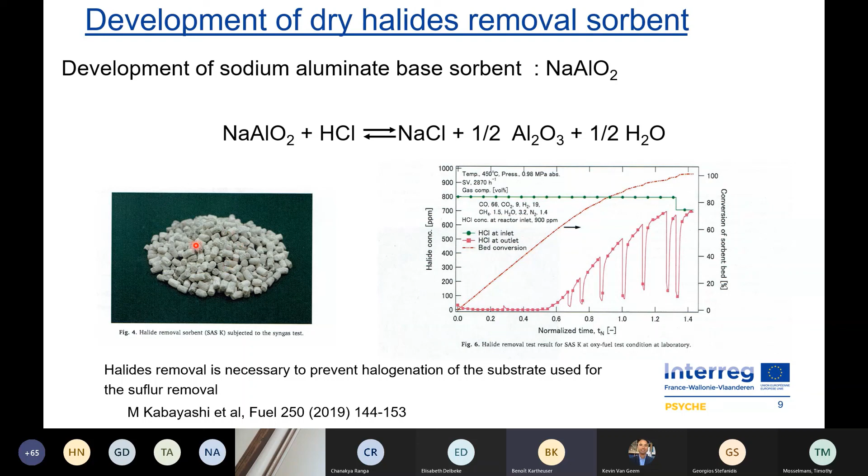It's important to have that to dimension the process. In this case, it's not possible to regenerate the pellets, and that's a waste.

In the case of the dry sulfur removal sorbent, metal oxides are very good candidates to remove the sulfur compounds. They react with the oxide to produce sulfur metals and water. The regeneration is made by oxidation of the sulfur metals to produce the oxide and SO2, which is then capped.

Some candidates are zinc oxide, copper, nickel, and cerium, which can remove H2S to lower than 10 ppm, even at the ppb level.

Other compounds like iron, calcium, or manganese could not be as effective, and if you need very, very low concentrations of H2S in the syngas, they will not be able to work for it.

Kobayashi also worked on the sulfur removal process, and they developed a sorbent based on the zinc ferrite system, and they managed to make a honeycomb support, which is actually also the catalyst that we can see. The process for the removal of the sulfur is actually in 3 steps.

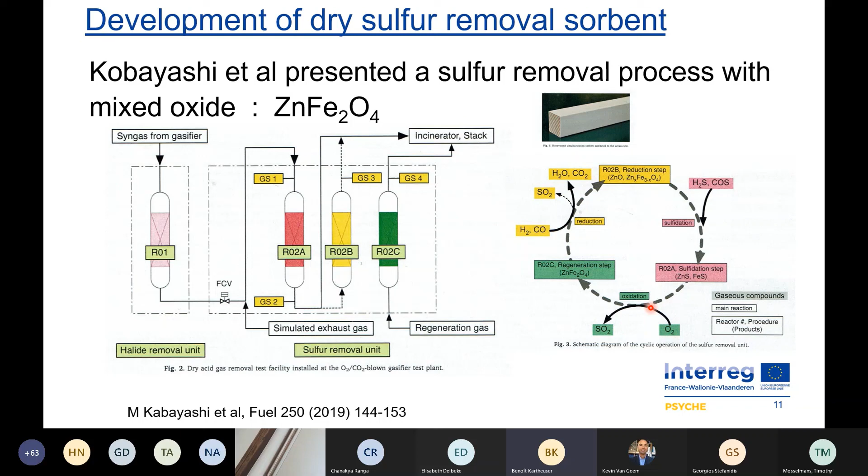This is an example of how the cycles work. If we take the first reactor, A1, on the first step, it does the sulfidation steps until we can start to detect some H2S or COS in the gas phase.

Then it does the second step, where there is the regeneration, producing SO2, and you can see oxygen passing through. That means the regeneration is over, and the last step is the reduction of the sorbent. Then it can start the cycle again.

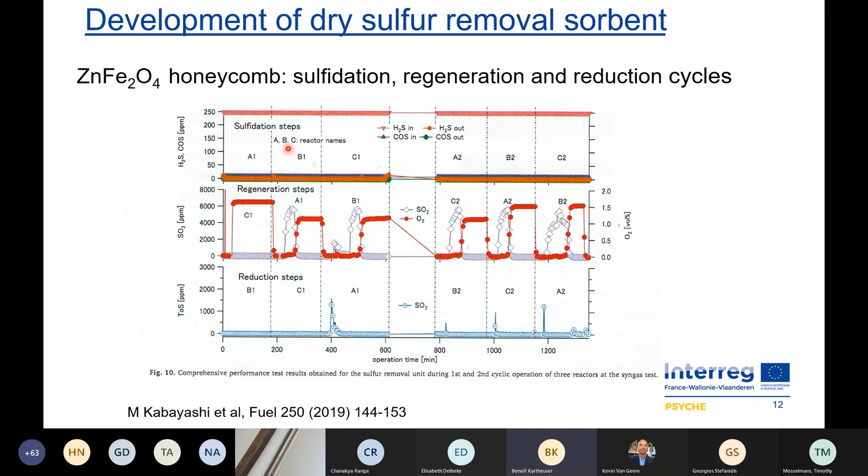And they were working around 450 degrees to remove the sulfur. This is an example of a breakthrough curve that we got at CERTECH with some zinc ferrite that we synthesized at CERTECH.

The conditions were not the same as we saw previously. We were working at lower temperature because my oven at the moment could not work at higher temperature, and also it's just H2S, COS on nitrogen and not in a reduced condition, which is less active in those cases.

But we can see that for H2S starting from 230 ppm, we managed to remove it, and for quite a long time. This is only 70 milligrams of the solid, and then you can see the breakthrough.

It's less effective for COS, but the concentration of COS is quite high in comparison to what you can find in a real syngas composition. From this curve, it's possible to dimension a reactor to know after how much time we need to pass for the regeneration step and for the reduction step.

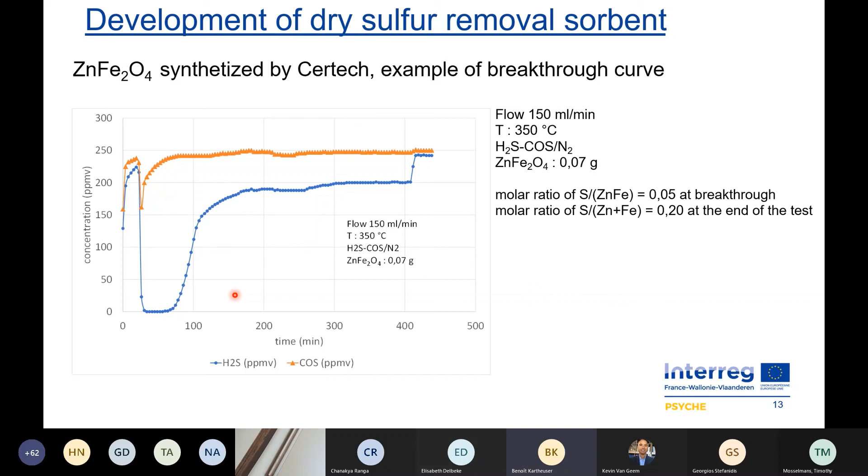Finally, the last development they made was a mercury removal sorbent, based on a copper oxide sorbent. They coated a honeycomb system with the copper oxide, and to be very effective, the first step of the copper oxide sorbent is sulfidation to produce copper sulfide, which is more effective to remove the mercury.

Then there is a reaction between the copper sulfide and the mercury to produce mercury sulfide. The sorbent is regenerated at a higher temperature with oxygen, producing some SO2, and the mercury can then be concentrated in a well-known system like activated carbon.

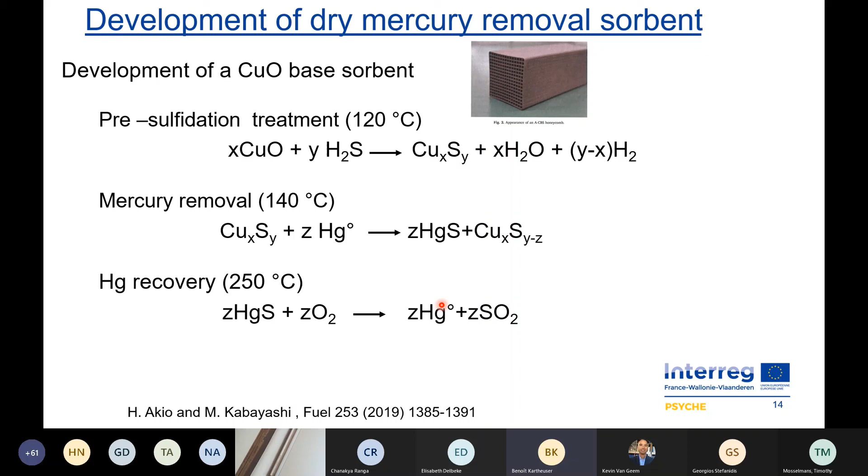Just to finish with a figure to summarize the mercury removal sorbent procedure: the first step is sulfidation of the copper oxide, then there is removal of the mercury on the surface of the copper oxide sulfide.

And then there is regeneration with oxygen and nitrogen, producing a highly concentrated mercury stream which is condensed in, for example, activated carbon. And the cycle can start again.

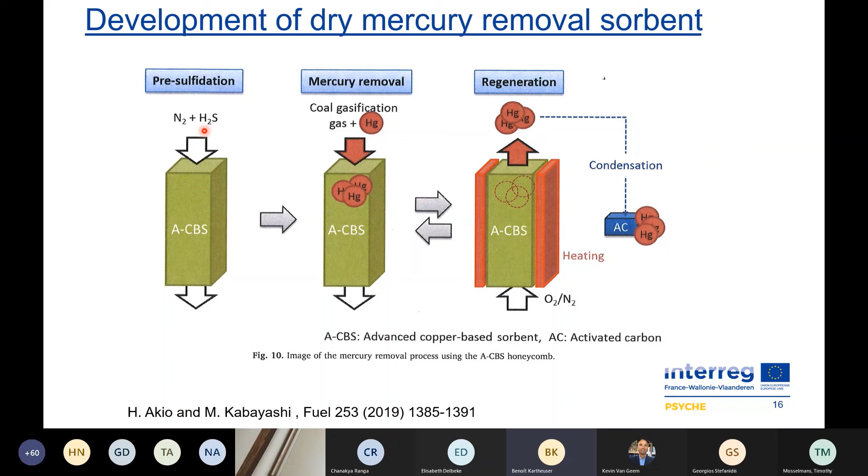In conclusion, for the dry cleaning system for syngas, there is interesting work being done on dry sorbent purification, like halide removal with aluminate-based sorbents, which actually produce some waste, regenerable zinc ferrite-based sorbents for H2S and COS removal, and copper oxide-based sorbents for mercury removal.

For H2S and COS removal, actually all metal oxides could be used, but the problem is the temperature of the regeneration system, which is often much higher than what we got with the zinc ferrite-based system, which is an interesting case.

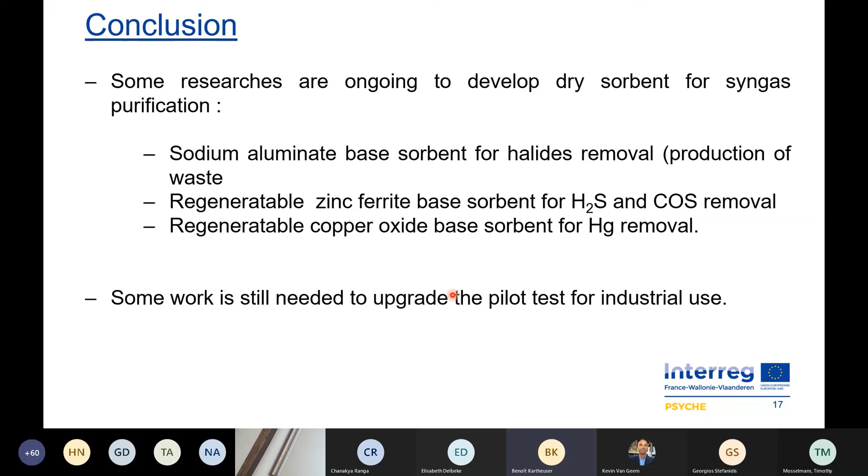There is still a lot of work to be done to pass from the pilot scale to industrial use.

The advantage of the dry cleaning process is that we don't need to cool down the syngas flow to a very low temperature, and there's some interesting benefits there. There is no wastewater treatment needed, as we could find in the cold system. Also, there is a possibility to remove halide impurities at higher temperature, and it's possible to remove sulfur and mercury on different types of sorbents.

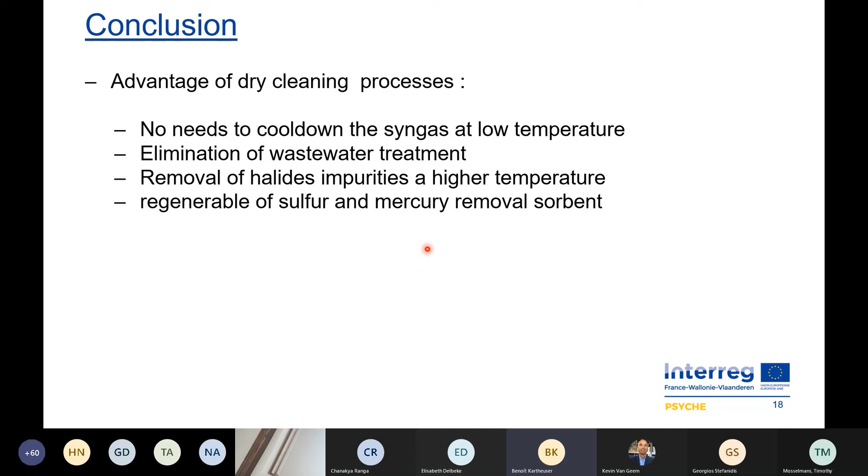Thank you very much, that's the end of the presentation.